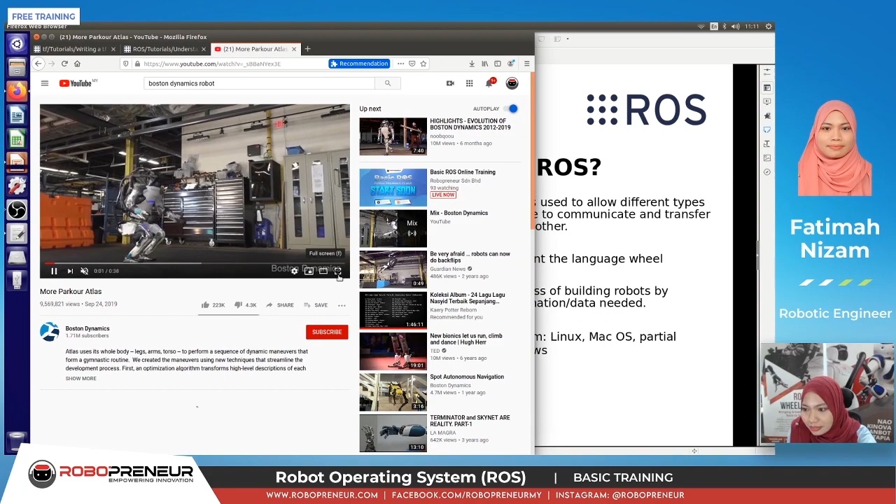So as you can see, I'll give you an example, which is the Boston Dynamics robot. You guys can see this - this robot is very complicated. It acts like a human being that can do parkour. It involves a lot of programming, a lot of engineers. By using ROS, you could actually build this type of robot to move in such a very complex way.

You can just search about the Boston Dynamics robots, and you can see many other types of robots that they built using ROS. It is highly encouraged for you guys to see the videos on YouTube.

So besides that, we'll go on to our class today. It is also for you to build robots by sharing the information and data needed, as I gave an example before. The last point is the supported platforms we can use to execute ROS: the first is Linux operating system, Mac OS, and also partial support for Windows.

For the partial support for Windows, I don't really recommend you use that, because if you use the partial support, you could only use the terminal to execute ROS. So you could not actually see the interface, the GUI interface, the real visualization of how you execute ROS.

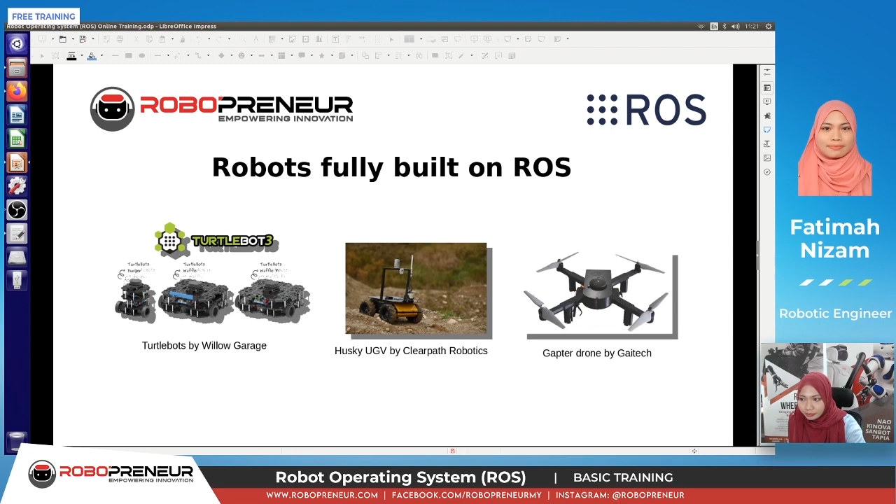Why is it so? It is because some of the packages built by using ROS Melodic Morenia are not stable. So in order to have a stable ROS package, I highly recommend you guys install the ROS Kinetic Kame version. The last date for it to be available is in 2021 - it is next year. So for now, if you guys have a ROS task to be built for this year or maybe next year, I highly recommend you use ROS Kinetic Kame because of the stable packages. But after 2021, you guys can move on and use the ROS Melodic Morenia version.

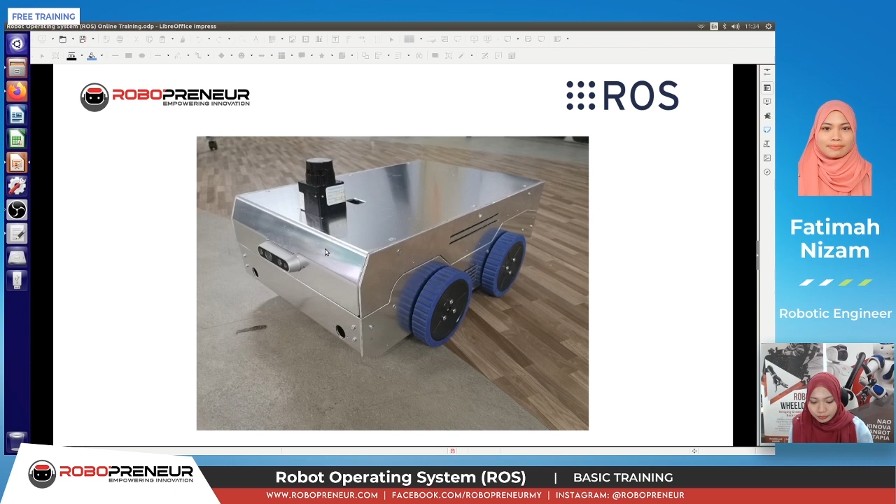So this is where ROS is very useful for you to execute a specific task like this. As the robot actually moves in real time in the real world, the visualization tools could also update you inside the software we use, for example the Gazebo and also the RViz software.

Alright, this is not a turtlebot, this is our custom-made unmanned ground vehicle robot. It is actually built by Robopreneur Sendirian Berhad, so it is not a turtlebot.

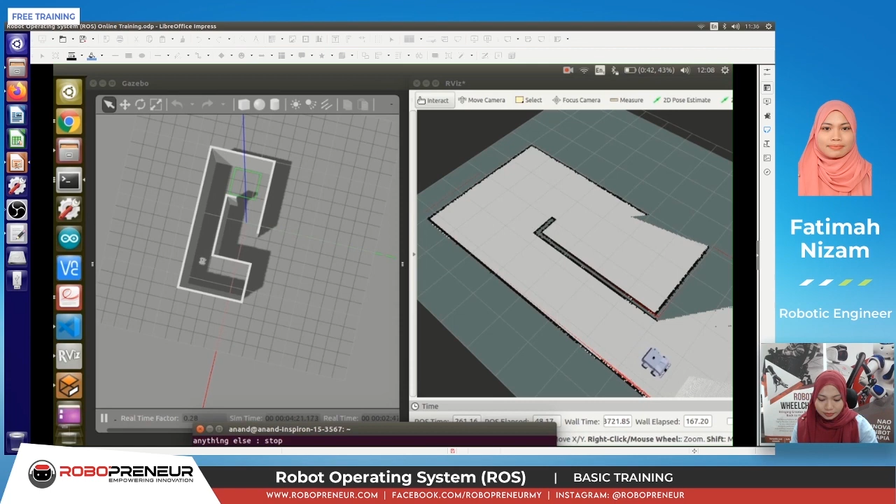So as you can see from here, it is the same. You can see the Gazebo simulation and also the RViz simulation, and in the terminal you can see the position, the x-axis and the y-axis of the robot updated in real time. So we can see the movement of the robot in the real world and also in the simulation tools. It is very useful for you guys.

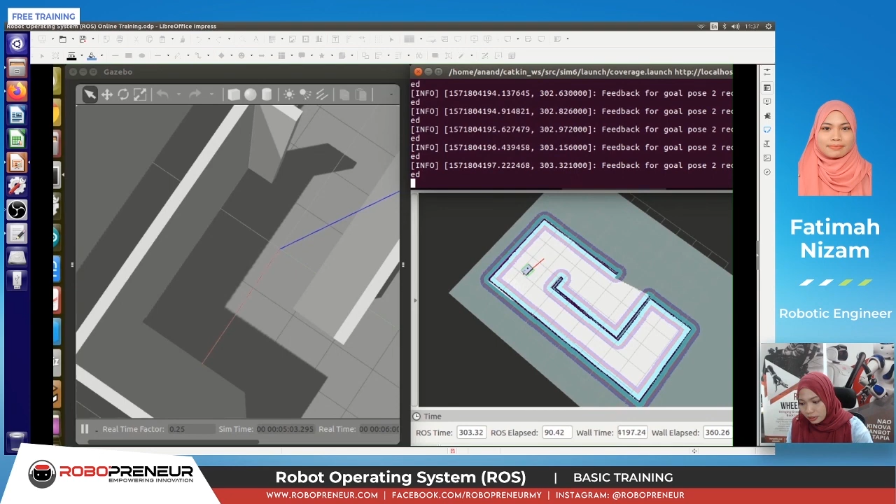Alright, so now we'll go on. This is a very important section for our learning today. We'll go on to the key concepts that are used in ROS. Before that, I would like you to understand these principles.

Now we'll move on to section 4, the example of the ROS application. I'll show you guys a video.

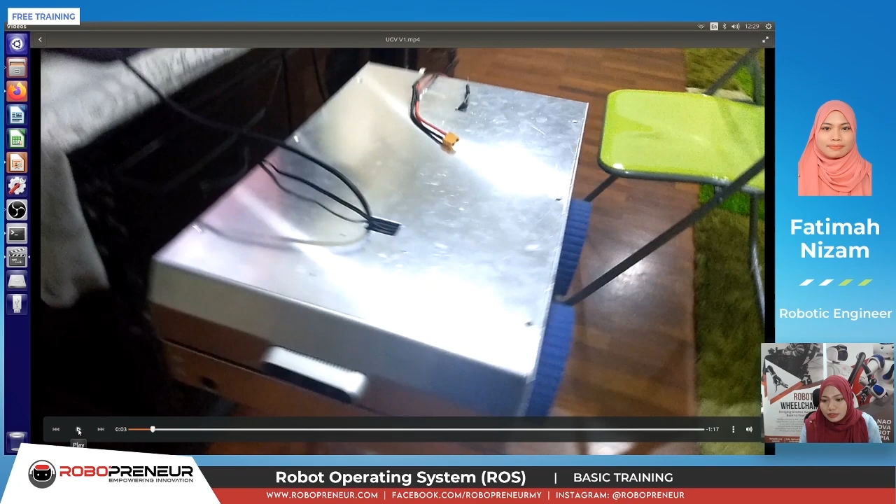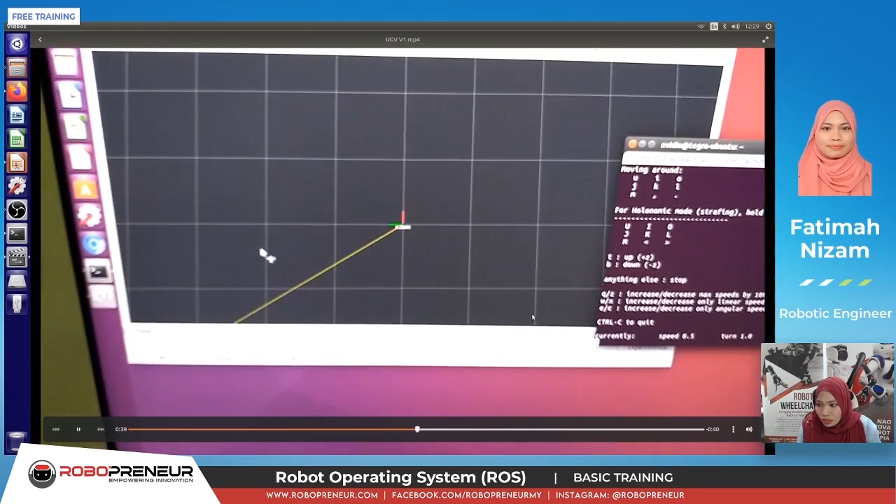This is our UGV robot, an example of our UGV robot. This is the real robot, and we're running a simulation or visualization of what's happening on the robot. We use ROS run teleop twist keyboard to control the robot in the real world—it's a keyboard interface to control the robot's movement. For example, if I key in any of the selected keyboard commands, I can control the movement of the robot, as you can see here.

While the robot is moving, you can use Gazebo and ROS simulation to see what the movement really looks like. Let me show you guys a better video so you can see more clearly. This is the terminal, for example.

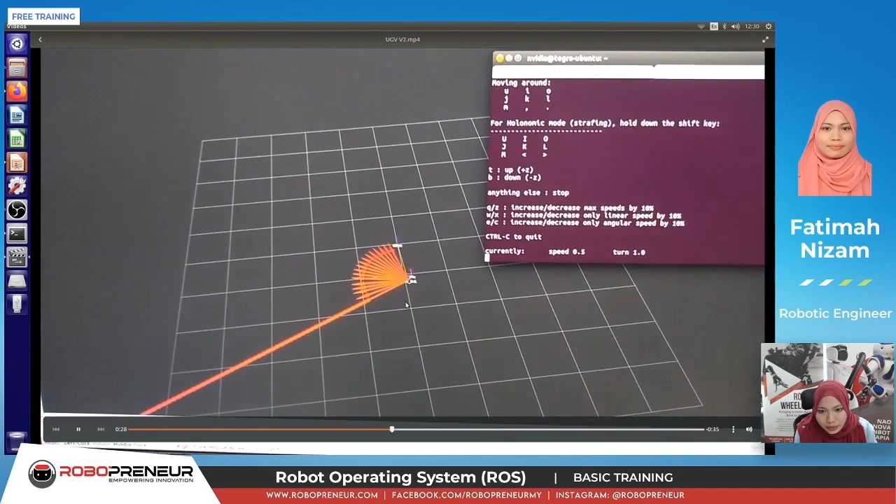This is another video, same setup. We run the teleop twist keyboard, and for example if I want the robot to go backward, this is its position—if I key in the command, you can see the simulation actually moving. If I want it to turn left, while the real robot is turning around, you can visualize it using ROS and the Gazebo simulation. So in real time, all of the movements happening on the robot can be viewed using ROS.

This is the benefit of using ROS—there's a lot you can do with it. You can find many examples on YouTube, like navigation, mapping, and more. It's very beneficial for you guys to use ROS.

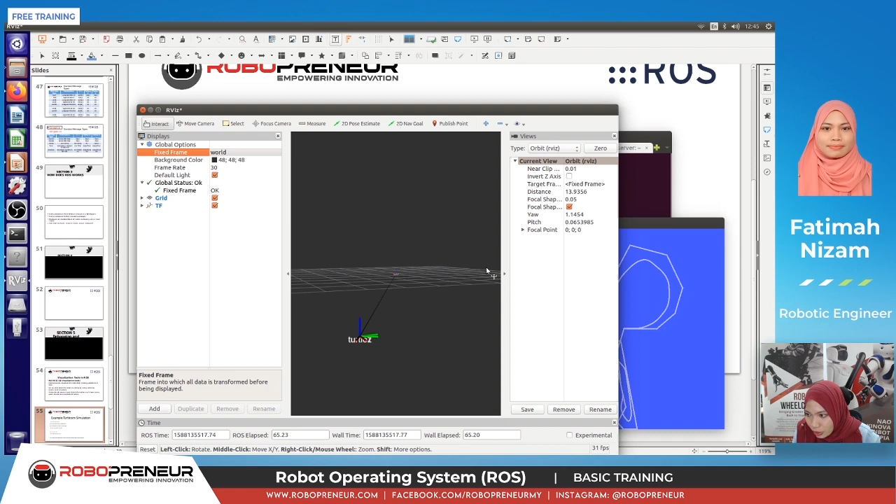So imagine that you are actually controlling your real robot by using this, imagine the TurtleSim is your real robot. And then I use the key, I click on the terminal and then use the keyboard to move the turtle. It's not very clear, but you guys can actually see that I'm controlling the movements of the turtles in RViz.

Okay, if you want melodic, just change the kinetic to melodic. For example, if you have this package in kinetic and you want to install it for your version, you can just select the word kinetic and change it to melodic. That is possible, yes, you can do it.

So that is exactly how you control, for example, this turtle sim by using RViz, and this is also how you could control your robot in the simulation tools. Okay, Control C to close it, Control C. Okay, it is closed. And also this one, Control C. Okay, so maybe I want to clear everything.

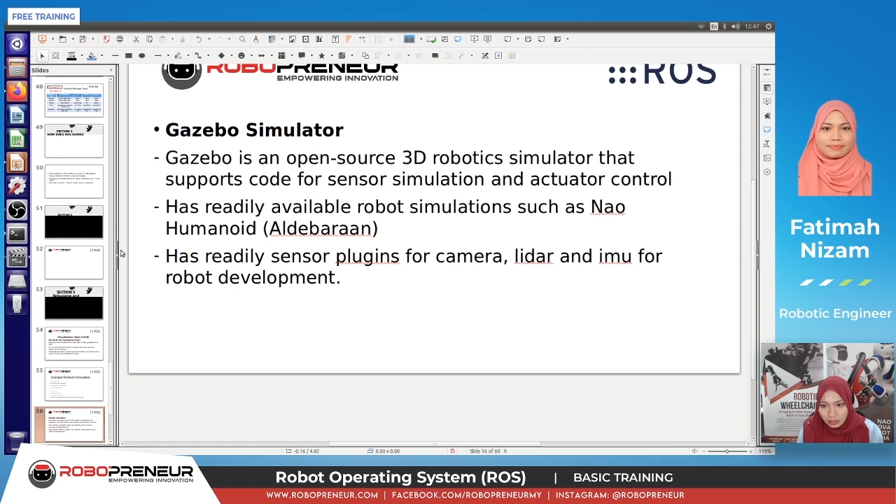So I'll give you guys a video on how Gazebo actually works. Okay, we have an example here. In the next slide, we are actually controlling the drone by using the Gazebo simulation.

Okay, so this is the video. I'm opening a terminal, a new terminal. I use ROS core every time I want to execute something. It is recommended for you to execute ROS core first. Every instruction step by step is available in the slides, which I'll give to you guys later. So this is one of the ROS launch files that we have, for example. Okay, let's see first.

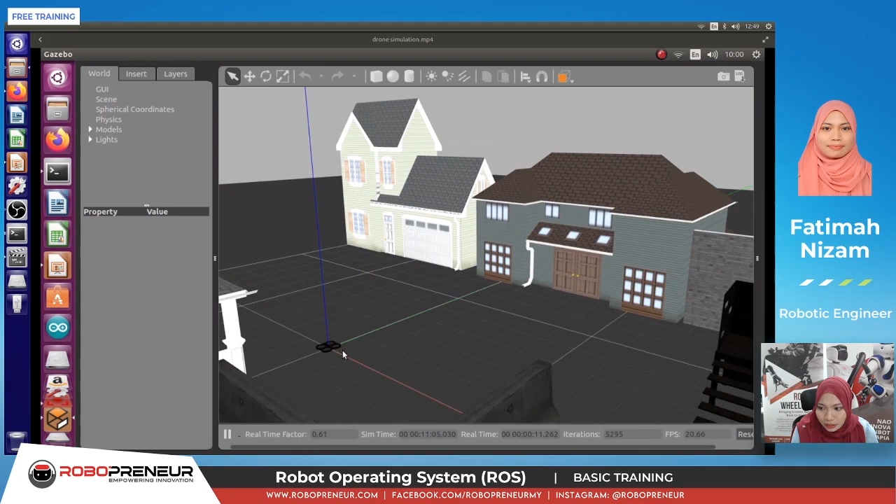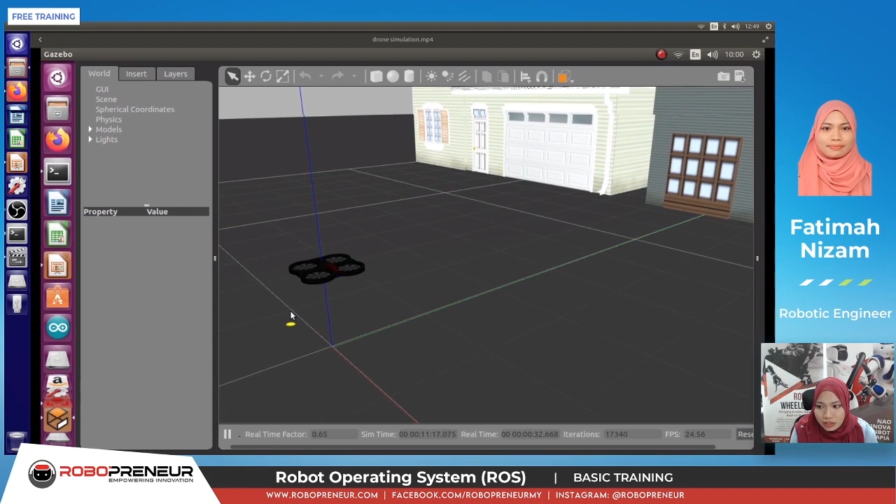Okay, this is the Gazebo simulation. Now you guys can see the simulation in Gazebo. You can see now that we have the drone in the Gazebo simulation, and I open a new terminal in order to control the movement of the drone. So that is where I publish a new topic, which is takeoff. You can see the drone is actually taking off. So this is very useful for you guys to have Gazebo simulation.

Okay, now I run the Teleop twist keyboard in order to control the movement of the drone forward, backward, and etc. Remember, when you want to use the keyboard, click the terminal first, then click on the keyboard keys, for example I, K, J, L, to control the movements of the drone. Okay, so that's basically it on how you want to control the movement of the drone.

So this is all of the instructions or commands that you can use to have the Gazebo simulation yourself, to have the drone Gazebo simulation. So later on, if you have installed your Linux and also your ROS, you can actually execute all of the steps.